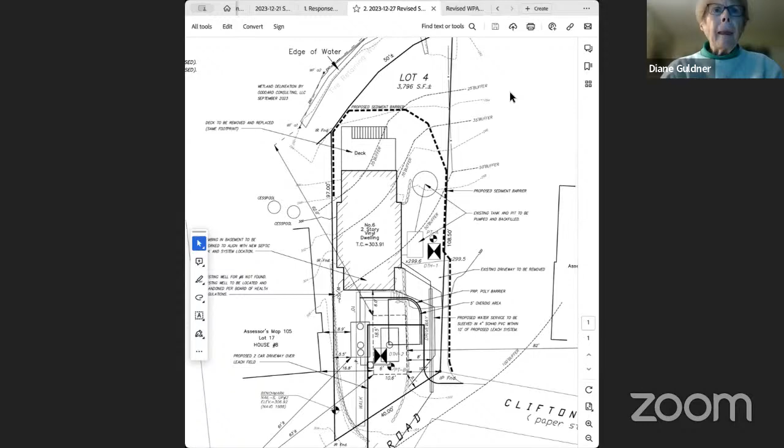Okay, can everyone see the site plan on my screen? Yes, a little bit, can you make it a little bit bigger? Yeah, that's bigger, that's big. Sorry, I'm trying to zoom back out, there we go. Is that okay? I guess, yeah, we can live with that. Sorry, I can zoom in as I'm talking maybe.

So to go over the proposed work, there's an existing deck here in the back with a patio that extends about halfway underneath the deck, which the applicant is requesting to replace all within the existing footprint. They also want to get rid of the old failed septic system and put a new one in the front, and then redo the driveway slightly.

The existing driveway comes up along the property line here, over and down. They want to move it over to this bold line as it comes up, over and down, just to create more parking space. This area will be converted back into lawn, and then there will be some house renovations, but all within the existing footprint, exterior and interior stuff.

So the applicant requests an order of conditions for the proposed work for the deck, the septic system, the driveway, and the house renovations.

Zoe, where's the driveway going to go? Is that right by the septic system? Yep, it's gonna go right on top of it. So if you follow my mouse, I know it's hard to see. I thought I had a colored up one, but it's this bold line that kind of comes up, crosses over and down.

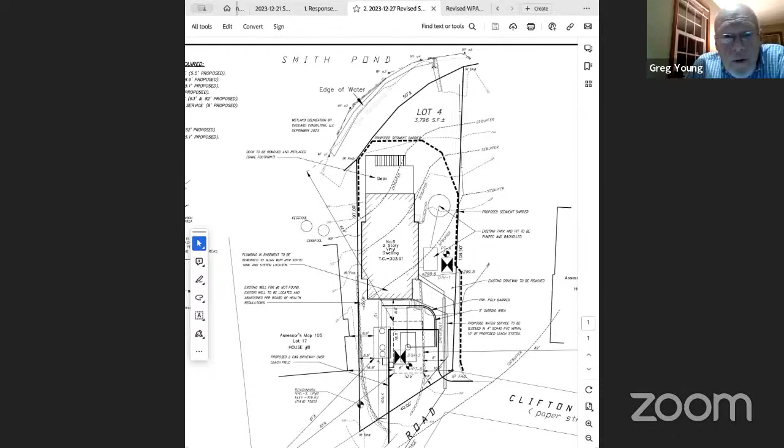Well, if I remember, the tires come back more than the edge of the water, Vinny. Those tires come back, there's a little bit of a gate down there, a little pathway down to a gate. Yeah, so it cuts in. I wonder if it's this, if you can see my mouse still. I wonder if it's this icon, if it's this drawing here, it does kind of turn up and along the side of that path.

I'm happy to pull up pictures if you'd like. I have some pictures. Yeah, just to add, I think that double line there is showing the tires. That's the actual, I assume that's what Vito, the engineer, did for the tire line. Yeah, that's what I'm thinking too. So I think it appropriately represents the extent of the tires.

There's a little chain link fence at the top of the tire wall on the south side, I don't see the north arrow on here, but kind of the left side, the southwest end. There's a chain link fence that is out there, and I know the plan shows the property line right there. So I wasn't sure at the last meeting, that was another question that came up. So I did a little research myself, and I checked the deed, and the deed says the property line goes to the edge of the water.

So it appears to me that the line on the drawing is incorrect, and it should extend all the way to the edge of water, unless the edge of water has changed that much.

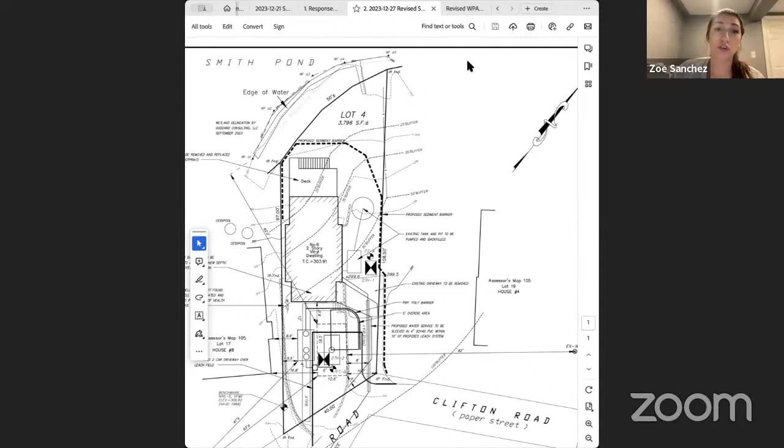Which would you mind pulling up that deed? Because I don't have it with me. I read it earlier and I actually didn't see that, maybe I missed it, I don't have it here, but I know I pulled it up. It's referenced in the assessor information, so I just went to that deed reference.

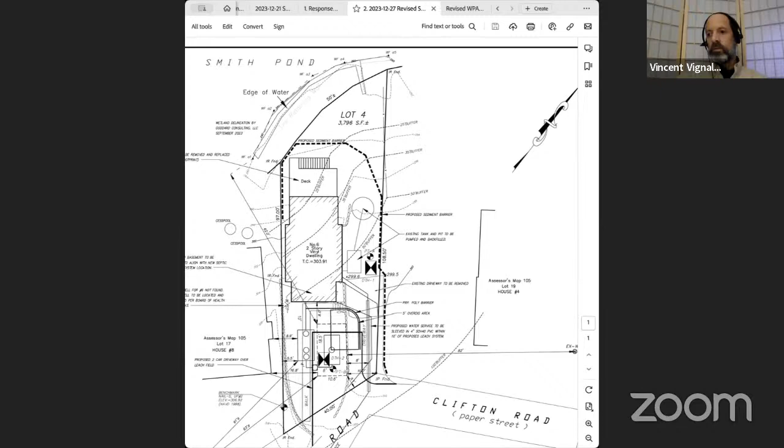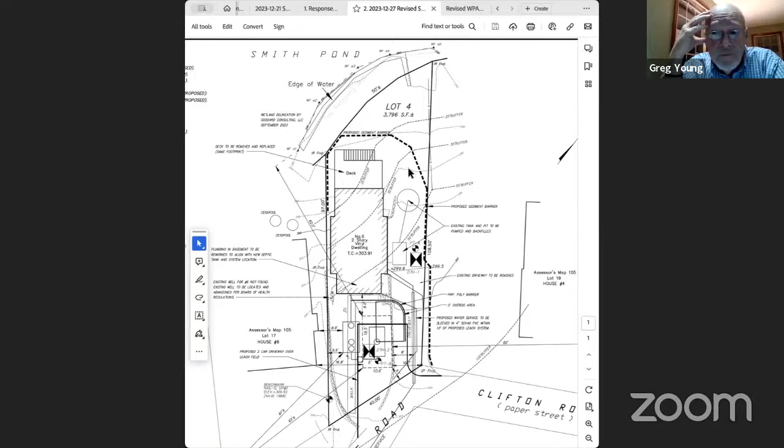Vinny, while you're doing that, here's a question too, Zoe. Do we know for sure that the tires are not further into the lot? Have we done any sort of soil testing, drilling down? I think the tires might be a little bit further back than just the retaining wall. I didn't do soil tests while I was out there, but I can pull up some pictures if it's helpful.

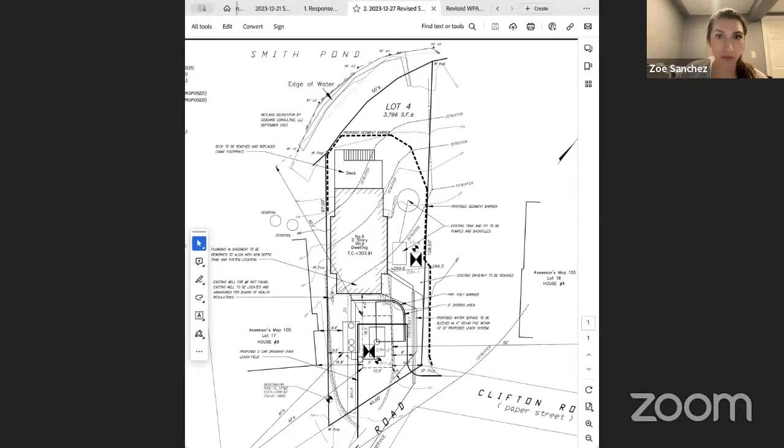All right, just figuring out how. I think I might have to stop and then reshare. Sorry about that. Okay, we have technical assistance with us here tonight.

But I've got a little sketch and some photos if you want me to share. Sure. It's coming.

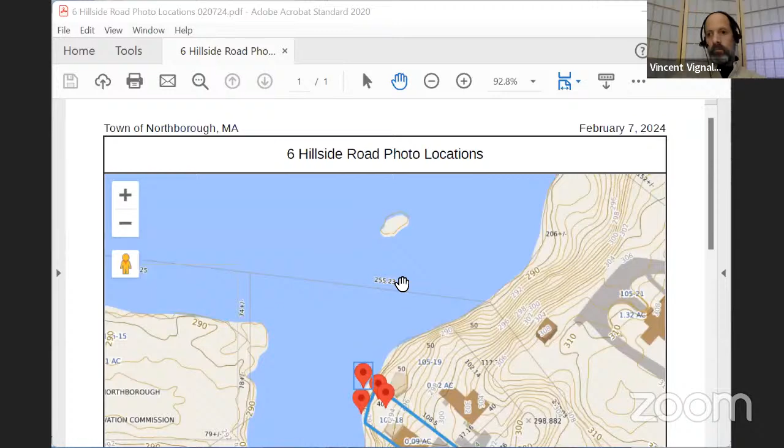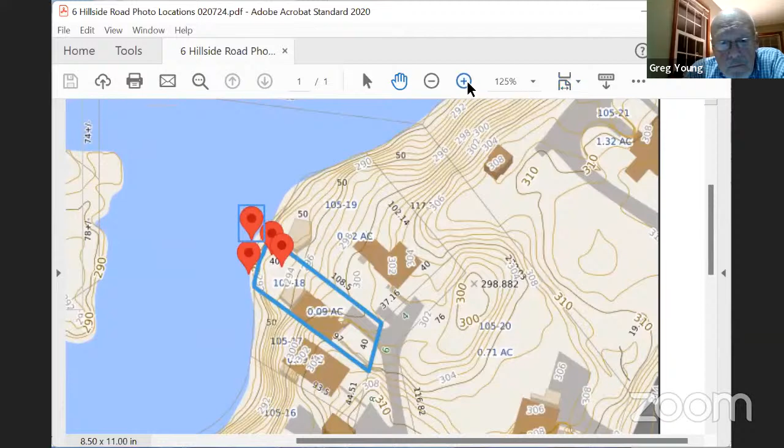So this is that same lot, and the pictures that are taken here, and around this side there. So now I'll try to get to the pictures. It's got to go get them from the file at the office, so it takes a minute or two.

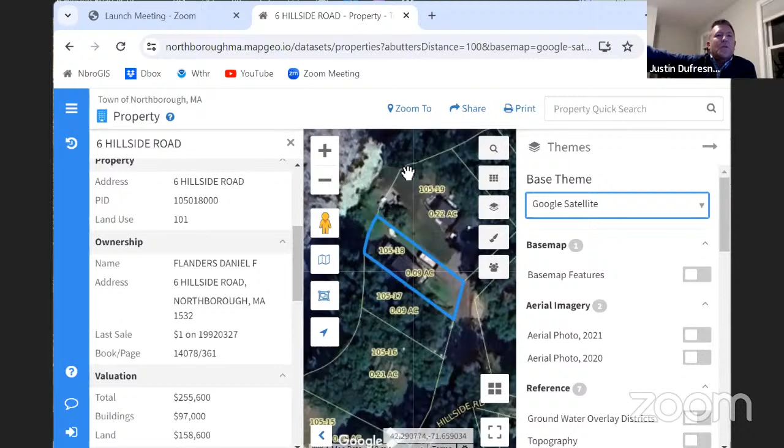And I wonder too, maybe it's something Zoe and Vito could look into, is just if you have tires like that - his tires to me always seem dirty, but then they seem like they're just rubber too. And if we had a man-made retaining wall right there, what would the real difference to the pond be? If it's a tire versus a concrete retaining wall, or steel, an old metal piled wall or something like that along it. I just don't know, is there really any major issue having rubber tires right there versus a wall along a pond like this. Obviously there's a man-made sluiceway over by Otis Street that allows the water to get through and down to the stream down there. There's man-made structures and things like that associated with it. I just don't know, would tires be any dirtier or worse to have there than something like that too?

Yeah, I think that'd be something worth the applicant looking into.

Through the chair, if I may. Sure. Thank you. So I just want to thank everyone. I really appreciate the comments.

And I guess if more research is requested for this, it's up to the applicant to look into this. But I think at this time, looking at the overall project of what we're proposing through this notice of intent - overall improvement, redoing the septic system, redoing the driveway, redoing the house and parts of the house and the back deck - overall it's a pretty simple, straightforward project. I would hate for this to bog down the main purpose, and maybe treat this as its own separate thing, because overall we're seeing an improvement. So I was wondering if maybe this could be treated as a separate thing where we can take care of what is proposed here and now, and then work with the applicant to encourage him to have us look into this for him and provide our help, and come forward maybe in the future to do something with this if necessary.

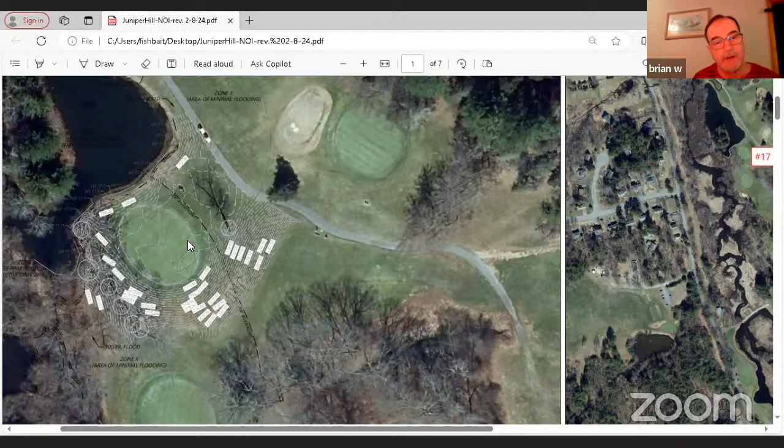And then this is the fairway going over to number 17. You have the pond here, so we have a wetland area here. This is a steep slope that drops down to the green. And then we have the mean annual high water for the Assabet here, so this riverfront projects here — it's protected over this ridge here. So there's really, we're in the riverfront, but this goes uphill, 15 to 20 feet. So that's the overall area.

Let me see if I can knock this down a little bit for you.

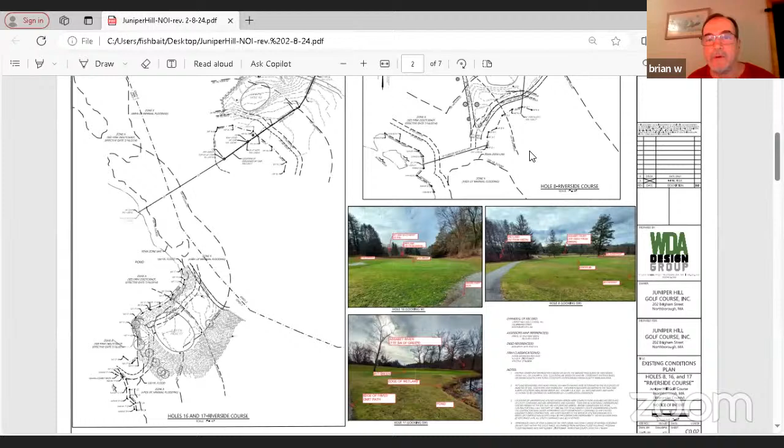So let's see, here's number 8 without the aerial, so it might be a little clearer. This is based on our field survey and some record plans, some of the record drainage that's already out on this hole.

Here's that 18-inch pipe we were talking about that goes between this wetland. You can see the existing cart paths, sand trap, sprinkler heads. This green was put in 1930 and has no subdrainage. Just the way it's graded, you'll get some natural runoff and it ponds up in front of the green. The grass needs to be redone.

So they're proposing to redo this green, add some subdrainage to tie into this existing drain line, and reshape the green a bit. They're going to put it back to existing grade, so there's no change to bordering land subject to flooding.

This entire area is within the mapped 100-year flood. It's unstudied, there's not a set elevation, it's the amoeba if you will. But they are going back to existing grade, so there's no fill coming in here. We're not changing the bordering land subject to flooding or losing any storage.

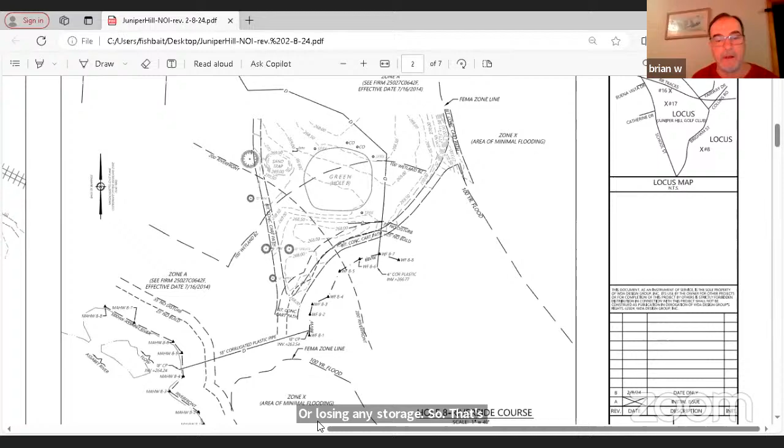So that's generally number 8. Let's see if I can get over here to 16 and 17. Can everyone see that? Yes. So you have the existing railroad tracks.

There's a historic drain line that runs through this fairway in front of 16, cuts through the wetland, and then comes out to the pond over here. This has an existing 8-inch and 4-inch drain that comes into this catch basin. Then within the catch basin, there's a 24-inch corrugated metal pipe that connects to the next catch basin and then runs out to here.

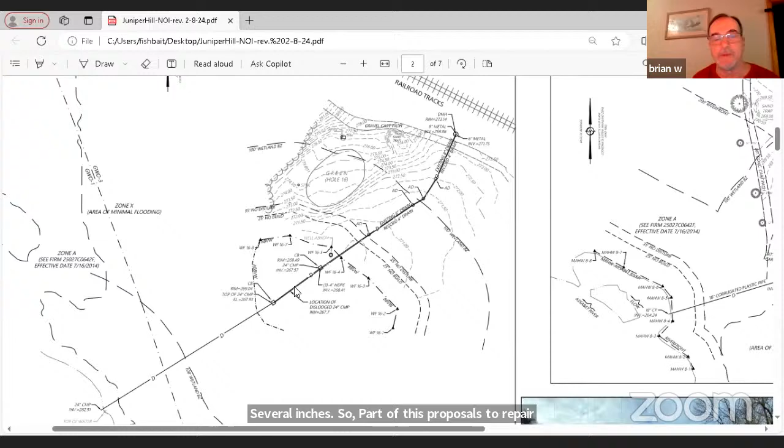We did identify there's a dislodged section of the 24-inch pipe here where a joint was put together and it's come apart several inches. So part of this proposal is to repair that joint. If you're out there, you do have flow going through it, but there is a breach in the top where it just needs to be repaired.

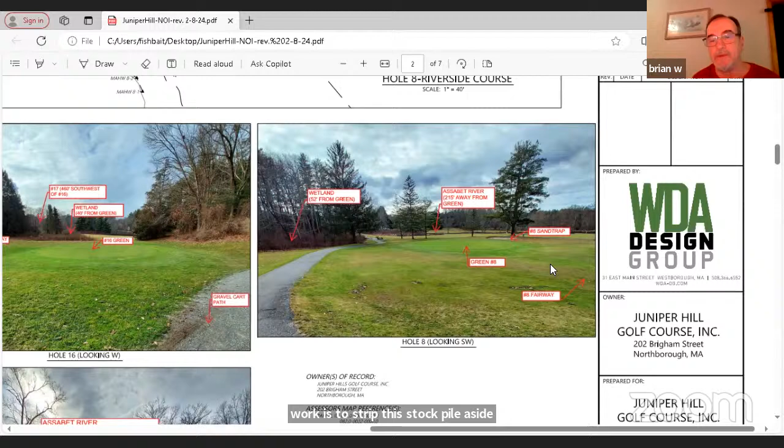To give you an idea of what we have on this hole - this is number 8, this is that wetland in the area, this is one of the cart paths. The Assabet River is back here about 215 feet away. This is the green complex number 8, the sand trap over here in the fairway. The work is to strip this, stockpile the sod, trench, put in your drain system, tie it into that existing drain, and then put it back to the same grade.

Over here this is the 16th green, existing gravel cart path. That wetland with the 24-inch culvert and catch basins is right here. This is the 16th fairway. And then the 17th is, as you saw in that overall fairway, about 450, 60 feet from this area.

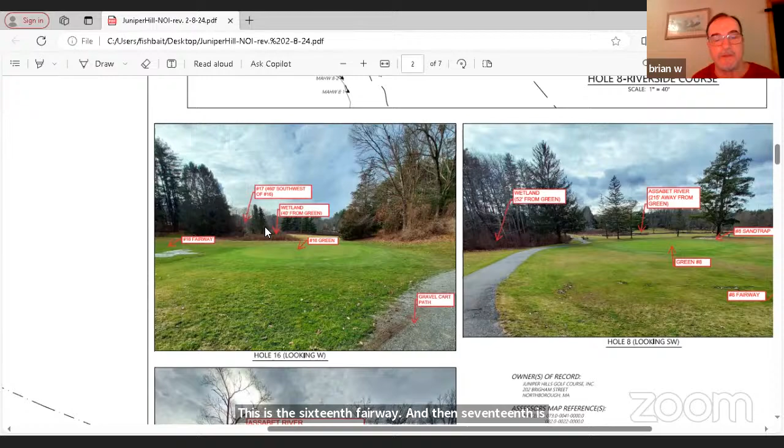And then this is number 17. We have the pond on this edge, so we have the wetland along here. The riverfront, the mean annual high water, is on the backside of this, 115 feet away. And you can see the hillside here that protects it between the river and here.

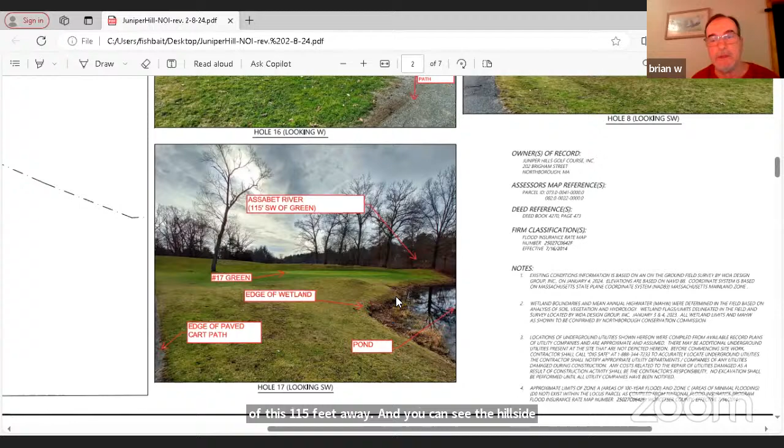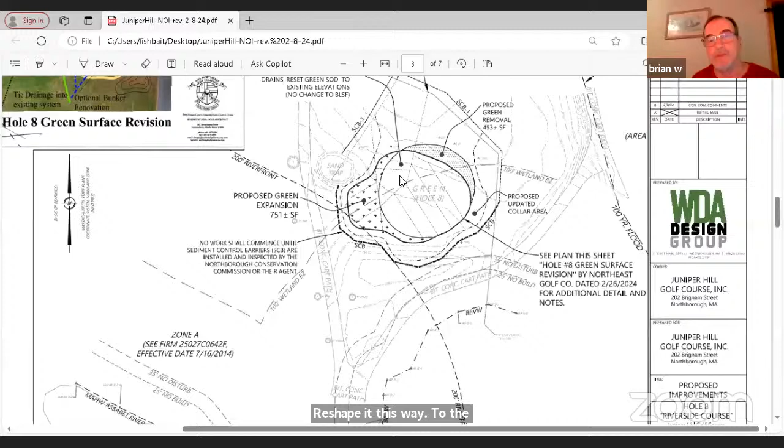Yeah, I might have to reduce this down. So this is number 8. They're proposing to remove about 450 square feet of the front part of the green just because of the drainage issues, the way it's graded in here. Reshape it to the same elevation, add in these new sub drains, and tie it into the existing main line here.

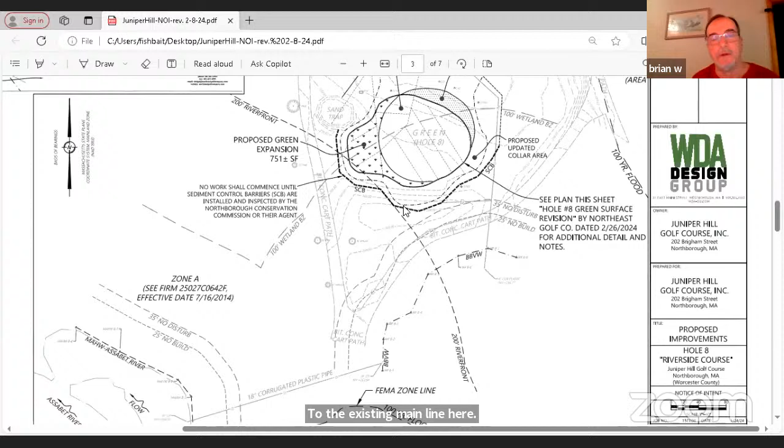We've got erosion control barrier - this is straw wattle with entrenched silt fence, or sediment control barrier. And then around the perimeter we just did a silt fence. This is flat, allowing them to get in here and close it off.

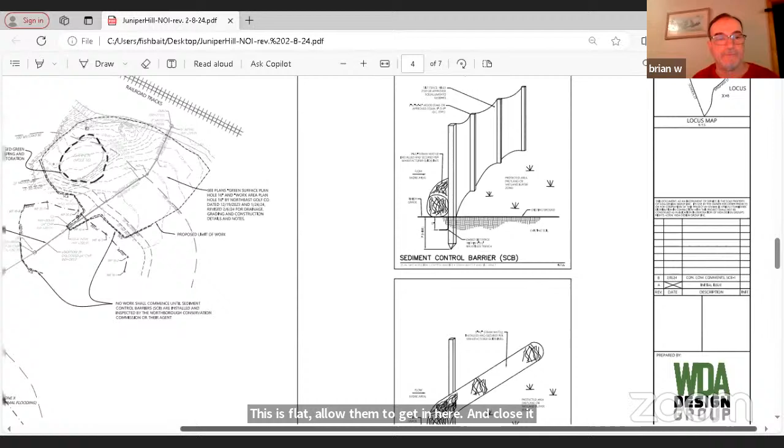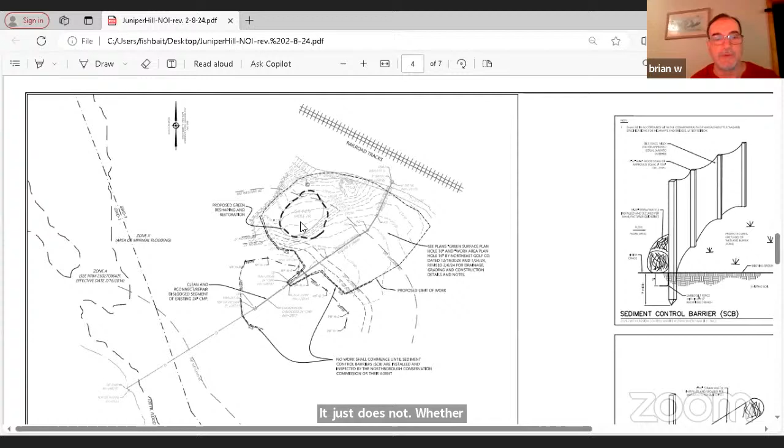Then on 16, you have the existing green here, so that would be reshaped, fix some of the drainage here, and add in a new soil complex and grass just so this can be maintained. It just does not weather well. This green was 1950, I believe, and green 17 in 1970.

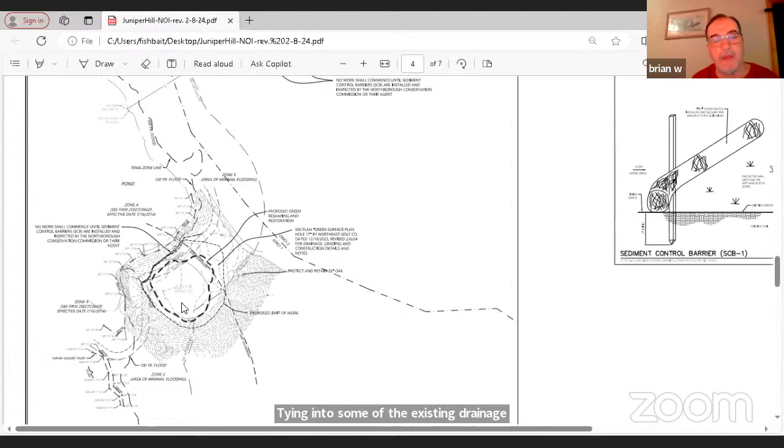So again, this would be improving drainage around it, tying into some of the existing drainage here, and then resodding this with the new soil complex. So it allows for future viability for the greens.

The Northeast Golf Company and the golf course architect, Robert McNeil, have much more detail on the grading, showing how the soil and sod complex would be for the green, and the proposed subdrain here. These plans detail the minute grading for the green with the drainage improvements.

This is really work on greens that have been there for many generations, improving some of the drainage and repairing that one separation on the 24-inch, which is general maintenance. Everything has erosion control barriers.

Vincent had some comments and we've addressed those. He also suggested we put in for a waiver on number 8 here for work in the BLSF. So we submitted the waiver request that we will be working the BLSF, but we're not altering the grades as such to lose any flood storage, potential flood storage.

Dudley, you can chime in, but I think they're trying to do this work in the March through September period, working it around some of the course and contractor schedule. But it should be fairly quick work once they can get in there and do it.

Dudley, do you want to add anything, or I'll turn it over to the commission and Vincent for comments? Basically, on the 16th, the water coming in on the right side of the fairway comes underneath the railroad tracks, so that's a donation from our neighbor, apparently. And with the weather we've had in the last year, it's been kind of untenable trying to keep the area mowed.

But Dudley, so the drainage work is really just on 8? Is that true? No, drainage on all 3 of them. On all 3. Yeah, okay. I'll take you down to the architect's plan on 16, 17. Let that clear up a little bit.

We had gotten an RDA on drainage on 1, 8, and 9 in 2022. That covered drainage on the fairway side of the 8th green and improved the drainage there, but had not covered any of the drainage underneath the 8th green.

I don't know if you can see this, but these new blue dashed lines tie into the main solid blue line there. So you've got the dashes under the green, and then this low section of the fairway, which is getting additional drainage from under the tracks collecting here. There are existing pipes, but they're just not adequate for the water coming through.

So that'll be cleaned up and tied into this existing line. And when the green surface is redone, you can see the new dashed lines under the green here that'll all tie back out to this main line. And then I think 17.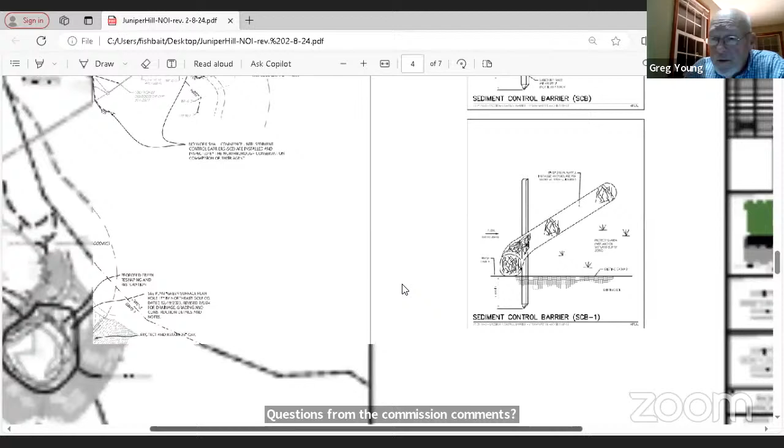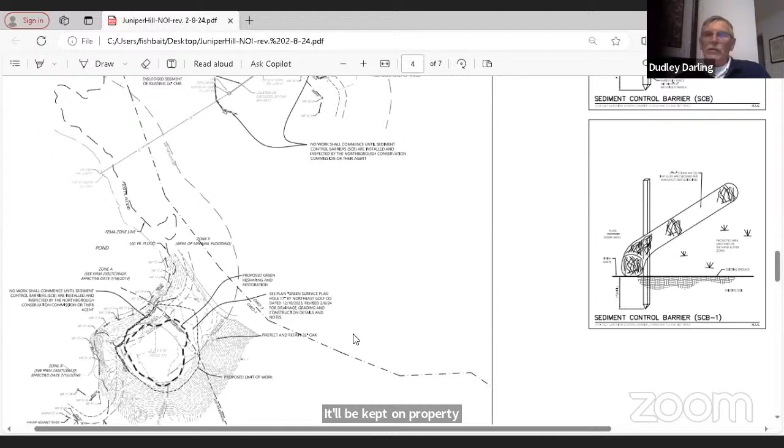I think you said you're digging out and replacing the soil at 16 and 17. What's the fate of that material? Are you trucking it away, what are you doing with it all? It'll be kept on property. Some of that will be used, amended with sand and soil and peat mix, and used in front of the 16th green. The rest will be kept on property.

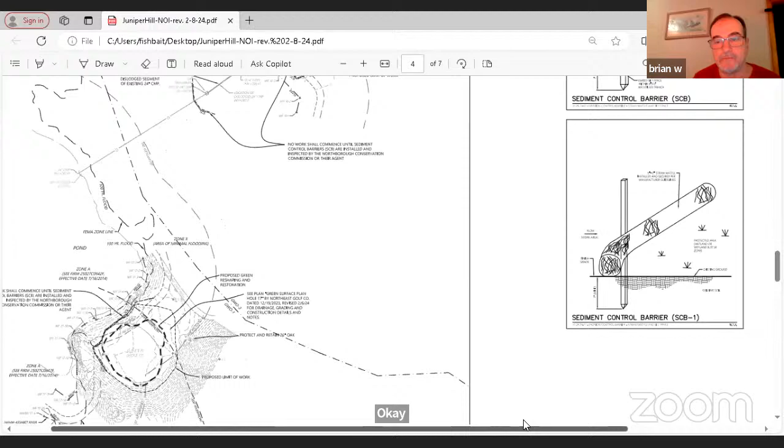Anything else, 16th? Vinny, how are you in this one? Oh, you're muted, Vin. You're muted. There you go.

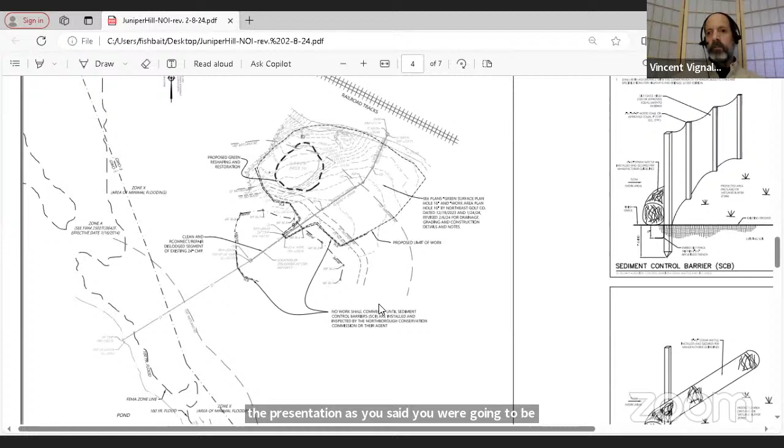Yes, Brian has addressed the questions that I had. The only question that came to mind during the presentation is you said you were going to be replacing or adding new drains in those under drains. Are you going to be trenching those in, or pulling the line through?

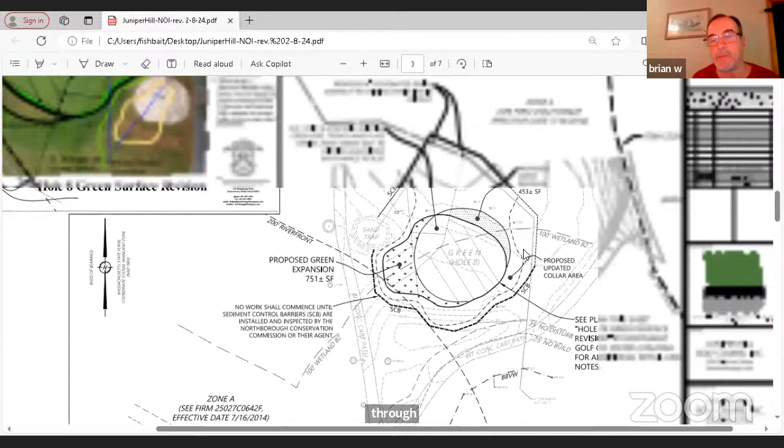On number 8, they would just strip the sod, stockpile that, trench these in. They're 4-inch drains, so they trench it, do their stonework, do the soil, and then replace the sod on the green. I believe those are good, I like those.

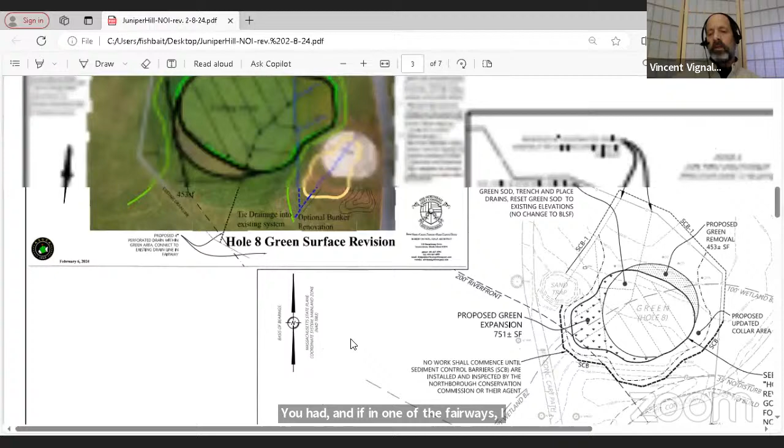In the area that was outside your sediment control barrier, in one of the fairways, I think it was the 17th, maybe, you said you were doing drainage out on a fairway and you were going to be replacing some lines. Oh, that's on 16 here.

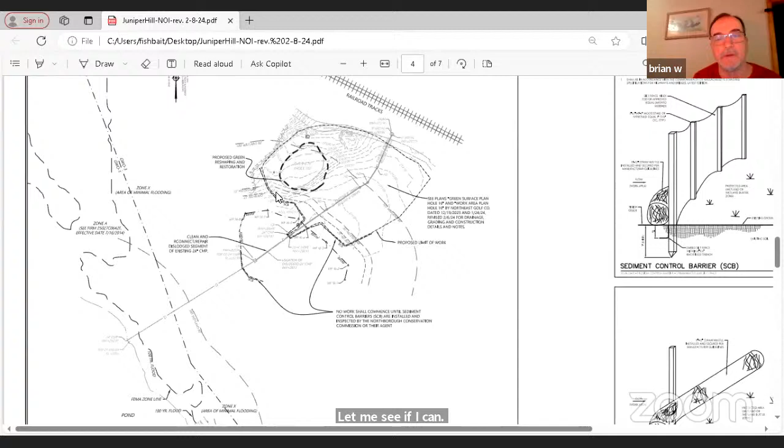Let me see if I can. And that was one that I asked about, making sure you had the sediment control around the work area. Yeah, we've got it. This is all new sediment control. Okay, yep, that's around right.

We extended it up here. You can see the grades, everything's flowing this way. So we ran it up to intercept this contour so that anything that potentially runs off is contained in this area. Okay, yep, that sounds good.

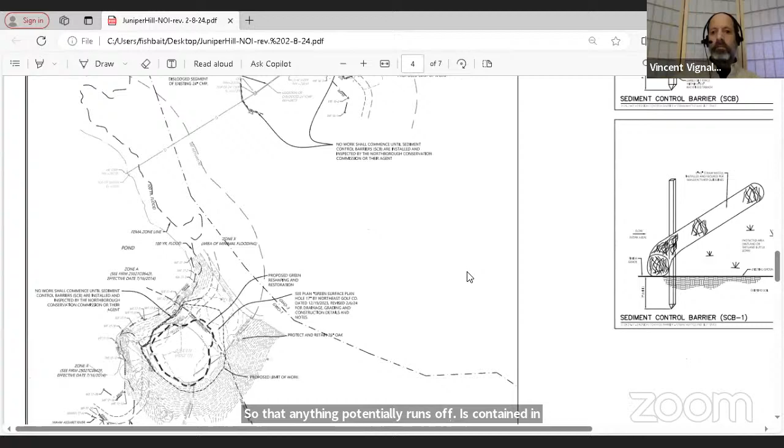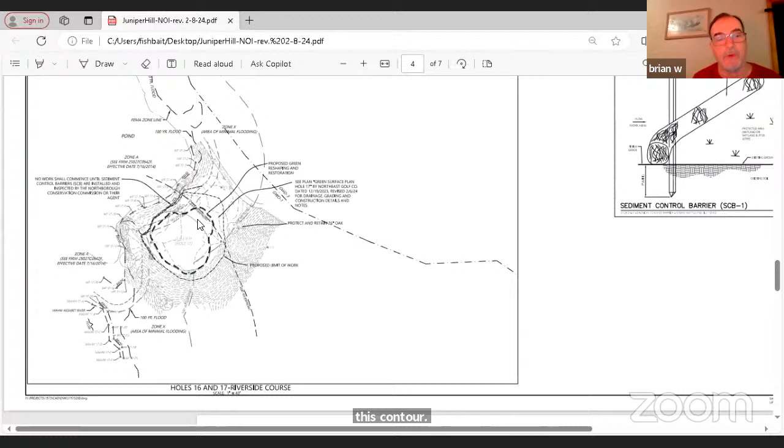Same thing here. We extended this a little bit to bring it up to this contour, so it surrounds the limit of work where anything could potentially flow is contained. So we've got it on this side there, and then this is all up slope.

Right, so it's just on the downhill side. Doesn't totally surround it, it's just the downhill. We don't need it at the top of the hill, only where it's surrounded by the flood zone. Right, and we extended that around.

We kept the double row with the straw wattle. Where did I go? Sorry, this one.

So we did the straw wattle with the entrenched silt fence on this side, which is the slope here. Out here it's flat, but we ran that around with silt fence so they can just get in and out of it easy. It's so flat right here, and this isn't going anywhere. And we ran it outside where it'll be tying into this existing line, so you'll have protection there as well.

Yep, and that's good, you want to enclose that because that's where it floods, so the water can come from any side. Yep, and we added the note here about no work until the barriers are in and they're inspected by you or members of the commission. So, yep.

Good, so this is, I guess you said a 6 or 7 month effort earlier, from March until September. Well, not the entire... they may be working - Dudley, you can clarify this - but no, the work won't take 6 months on each green. It's just they may do, I think, 16 and 17 first, and then 8 towards September.

Is that correct, Dudley? Yes, yeah. The contractor we were working with originally was booked 2 years out. He had a window of opportunity to do it late February or March, but we still have frozen ground in spots where he would be working. So he's going to try to do it in conjunction with another project, and I think he's working on the country club.

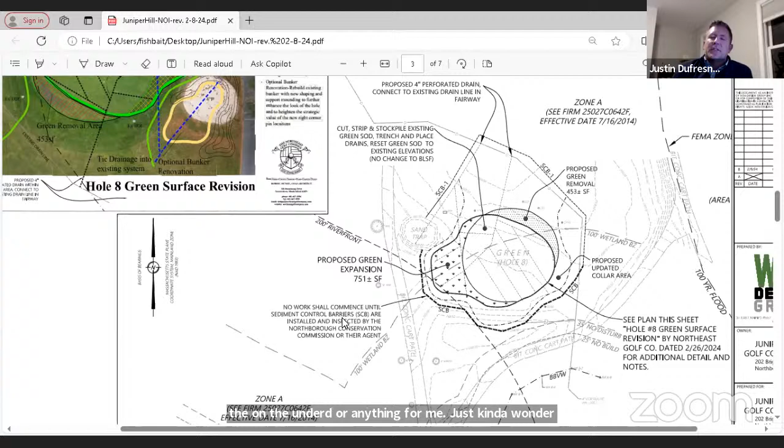Just kind of wondering, Brian, you said they have to get into that wetland, right, to repair that pipe. So what's the plan over there? Like, do you mat that thing or something to get a piece of equipment in there so you're not mucking it all up, or what's it look like over there?

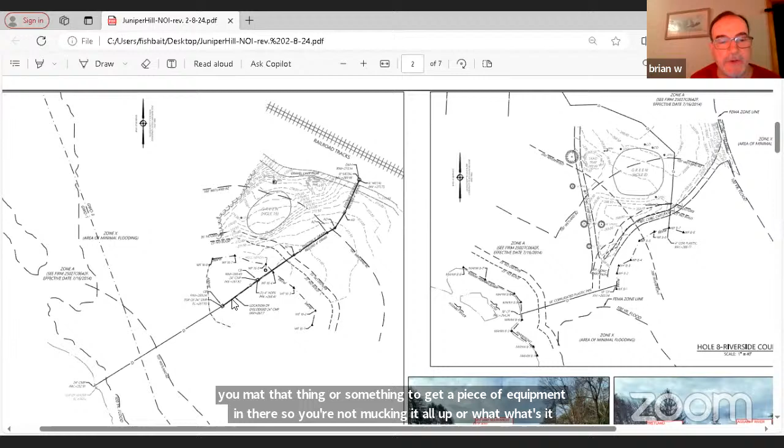I don't know if I have a picture. We got pictures of the pipe. I'll have to send those to Vincent if I didn't already, but let me try to zoom into this, Justin.

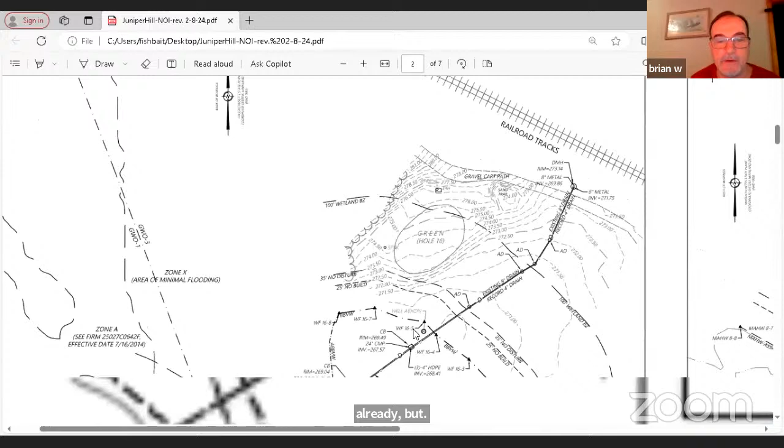So the break we surveyed is located right here, literally probably an inch or two where the two sections were joined. Looking at the photo, our hope is — and it looks like, because the top of the pipe is about an inch or two out of the soil — that you can just hand dig around it and join the pipes, or add some kind of rubber seal around it. So our thought and hope is that it can all be done by hand while the soils are dormant.

Good, and then in the spring when it grows, you won't even know you were there. But if we had to get in a machine, you'd have to do some kind of corduroy bridge like the utility companies use. Our hope and goal is that that's not the case. If it's not very deep and right near the surface, hopefully they could just pick away, get to it, and get a coupling on it.

That's our hope, and it looks doable. I can send Vincent some pictures if he wants to forward them to you guys, just so you can see exactly what we're talking about. I should have brought one of those up, but yeah, it's a 24-inch corrugated metal pipe. It just separated in that location about an inch or two, so hopefully it can just be all handwork.

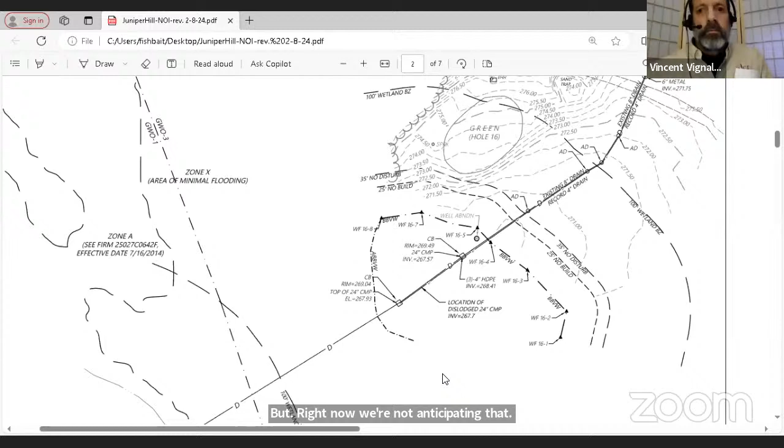I can include that as one of the conditions. You all set, Justin? You good? Yeah, yep, thank you. Anybody else?

See if we have any public attendees. No hands up.

Vinny, any special conditions you see here other than what you just mentioned? No, we pull out the standard conditions, but I don't know that we want to mark off the 35-foot no-disturb zone on this one, so I don't think we'll need signs or boulders out there.

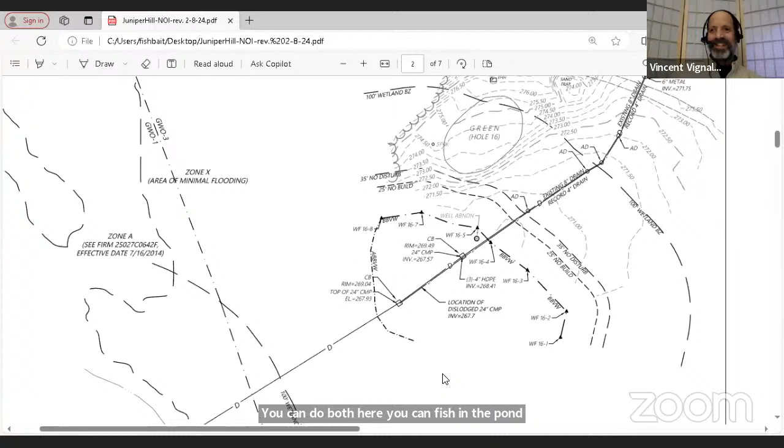There's enough trouble for you golfers out there already. And you're not even a golfer and you're speaking that way. Yeah, not all those stories are true. Okay, don't torture yourself, Vincent. Yeah, that's right, I'll stick to fishing. There you go, well that's torture enough. Trust me, you can do both here — you can fish in the pond on 17. I've seen fish in there before. For your balls, right? Yeah, well, another story.

All right, good. So if we have no other questions or comments or concerns, I think we can move to close the hearing.

Is there a motion to close the hearing on 202 Brigham Street? So moved, by Diane. Is there a second? Second, by Dan. Roll call: Dan Clark, yes. Justin Dufresne, yes. Diane Goldner, yes. And I vote yes.

We now need to issue an order of conditions for 202 Brigham Street with the special conditions as mentioned, around the prep work for the digging process on 16, 17 — the 24-inch pipe between 16 and 17.

So moved, motion made by Dan. Is there a second? Second, seconded by Diane. Roll call: Dan Clark, yes. Justin Dufresne, yes. Diane Goldner, yes. And I vote yes.

You're all set. All right, thank you very much everyone. Thank you. Good luck. Good night, good luck in the storm tomorrow. Yeah, right, same to you. All right, take care.

Okay, I've got a hand up here. Zoe has her hand up. I'm bringing Zoe in.

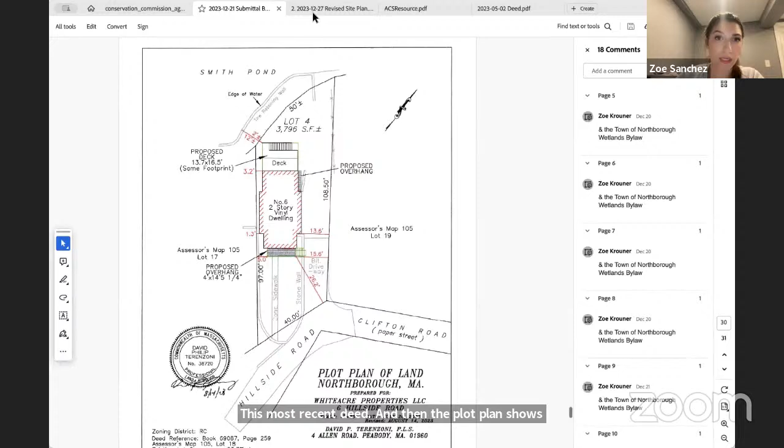And then this is the other deed. It says pretty much the same thing as the most recent deed. And then this is the plot plan that this book and page number matches up with this most recent deed. The plot plan shows those property lines at 50 feet from the edge of the pond. And then the revised plan from Cornerstone took that plot plan information onto this one.

So I would say, Zoe, I've worked in surveying for years, so I would get the surveyor to just take a look at this and certify it. Basically what it says to me is usually when it says by Smith Pond, it means along the pond for 50 feet. It's not saying it's 50 feet away from the pond. It's saying that length, approximately between the iron rod found at that corner and the iron rod at the other corner, is about 50 feet in length along the pond.

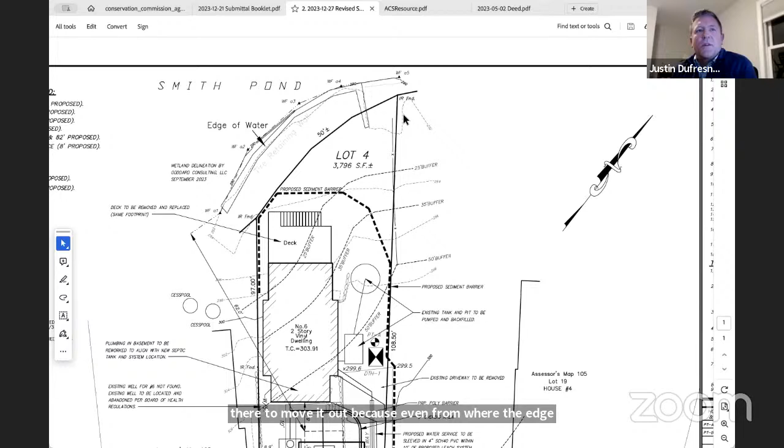So that's probably where the prior edge of water used to be, where that 50-foot dimension is, before they constructed the tires and put fill in there to move it out. Because even from where the edge of water is now to that line is probably only 10 feet, based on your 25-foot buffer zone there too. So it's not saying that's 50 feet away from the pond, it's saying it's 50 feet along the pond. That's how I read it. Basically, walk west 50 feet along the pond. Yeah, that's how I read it.

And the pond has moved over these years. Yeah, we see this a lot. I've seen a lot of old deeds, especially along ponds and streams. We see it a lot on streams, along the edge of the stream. It doesn't always fall right where that is, because it certainly varies over time.

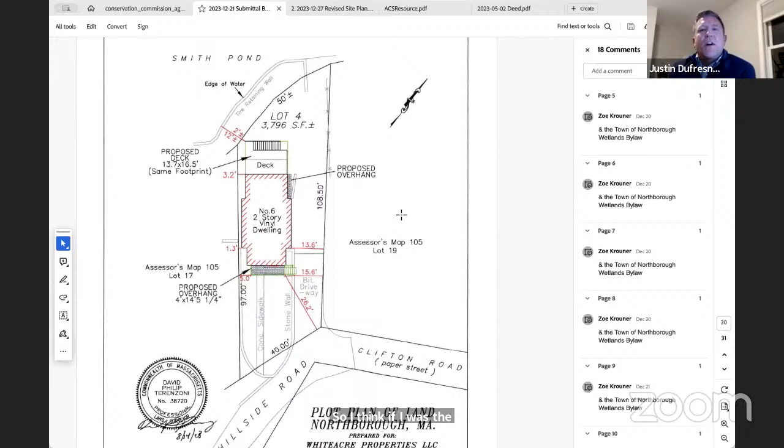So I think if I were the surveyor here, I would look at those iron rods they found as probably being the most important thing, because your deed reference between those iron rods, if it calls for certain lengths, like 108.5 feet or 97 feet exactly, and if they found rods there and those distances match, then those are pretty good indications of your property corners. And what happens along the pond fluctuates over time, but those corners might be right.

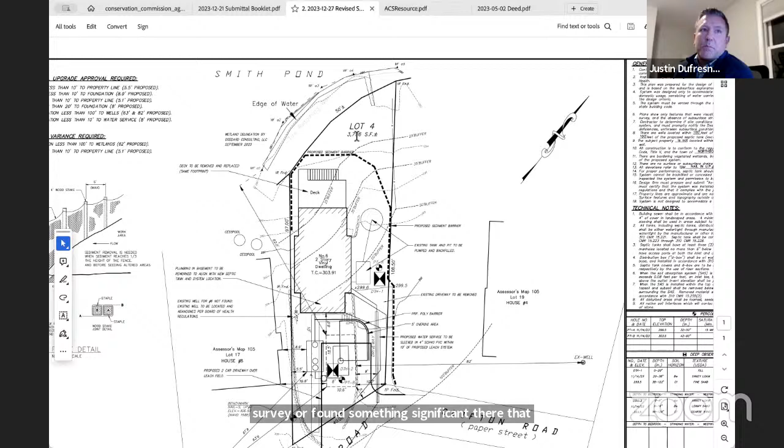And that's where, when it says iron rod found at each one of those corners, that tells me the surveyor found something significant there that matches the deed. That leads me to think that, based on those iron rods, those tires may very well not be on the property, based on the way the property is described. So I think it's going to need a surveyor's interpretation, but it would be good for them to really dig into that and certify exactly where that line is.

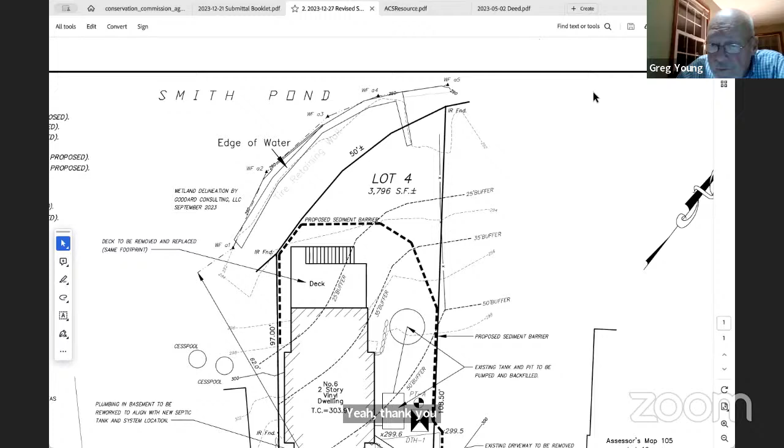Yeah, thank you. You okay, Zoe? Yeah, thank you for that. I appreciate it. Okay, thank you. All right.

That I think is the end of the... No, 0 Hudson Street. 0 Hudson Street. Thank you very much. They've requested a continuance. Yes, yes.

Yeah, they have no DEP number, so that's true too, yes. We need a motion to continue 0 Hudson Street to March 11th. So moved. Second on that one? Second. Second by Justin. Roll call. Dan Clark, yes. Justin Dufresne, yes. Diane Goldner, yes. I vote yes. Continued. Okay, no COCs, no violations.

Yeah, at some point in time, Vinny, we should probably talk about the patio and smoker at whatever number 4 Hillside, Hillside Road that is. Yes, but we don't have to do it now. Yeah, that actually looks like it has occurred in the last 5 years. So that'll be an interesting one to talk about. Yeah, we'll take some photos and bring those to next month's meeting. Okay, just something to look forward to on the side.

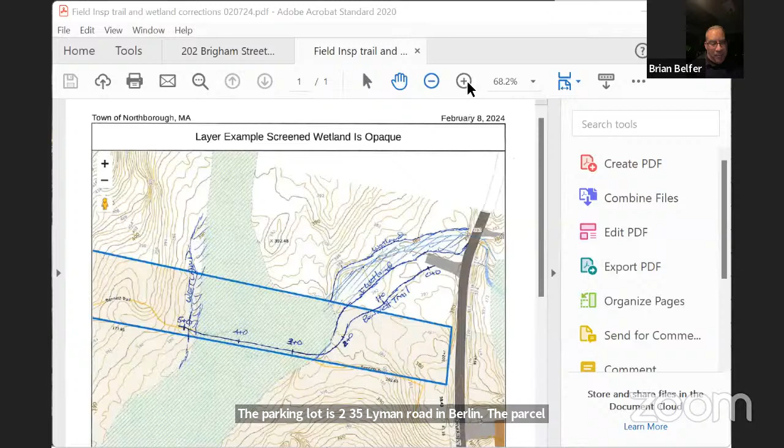The parcel, to the best of my looking at the map, is Northborough land. There's 10 old 2-foot by 12-foot long footbridges, some of which are in moderate shape, some completely destroyed, all of which are too short and too slippery. Basically that whole entrance to Pisgah has been neglected. We probably should have done this project 3 years ago.

So what I'm proposing is to replace all of those bridges, but reuse almost all of them. Basically one by one, if you want me to read through this, or I could do the summary. But we're going to make proper bridges that are both taller and a little wider, to get up out of the creek and let the water flow.

So the whole first half basically covers bridge replacements. Everything's going to be a little longer, a little wider, a little taller, with ramps so that people can get up and down without giant steps. There's a couple areas of the trail that are super eroded, it's all rooty adjacent to the rock wall. We've had good luck just dropping crushed bluestone to level the path with the roots.

But I want to make sure that's an acceptable thing to be dropping. Obviously it's just crushed bluestone, just introducing some stone. It's not changing the water flow, it's just basically getting the terrain up to the rooty level.